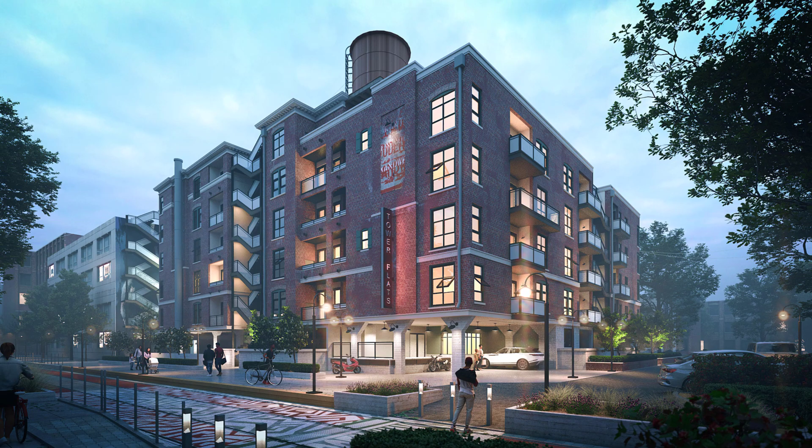I understand that many of you might have different workflows or different Archviz needs, and you might prefer programs that aren't the same ones I prefer, maybe because of price, speed, or overall power and capabilities. Remember I also have courses in other software like Twinmotion, SketchUp plus Lumion, and Unreal Engine. These are all great software that are very good at what they do. I also understand my needs, workflow, and goals in Archviz might be different than someone else's, and there are various different levels of visualization that may be needed.

But for highly realistic, professional architectural illustrations, visualizations, and animations, I still choose 3ds Max as my core Archviz software. I'm going to make my case in this video for why I think 3ds Max is still the best way to go. If you think my points suck, come at me in the comments, I'd love to hear your side of the discussion. And if you want to know the ultimate reason why I think Max is the best, or want to get a screaming deal on learning 3ds Max for yourself, stay tuned to the end of the video.

Okay, let's get into it with point number 1.

So the first thing is pricing options. This may seem like a strange one because to me 3ds Max has seemed way overpriced for a really long time. However, with the introduction of the Indie license, it actually became a really good deal. Mind you, this price does not apply to everyone, so if you're a big company, you can ignore this one, but for indie users, 3ds Max is an amazing value. Let's compare: 3ds Max Indie for 1 year costs $305. The full price is $1,875 if you don't qualify for the Indie license.

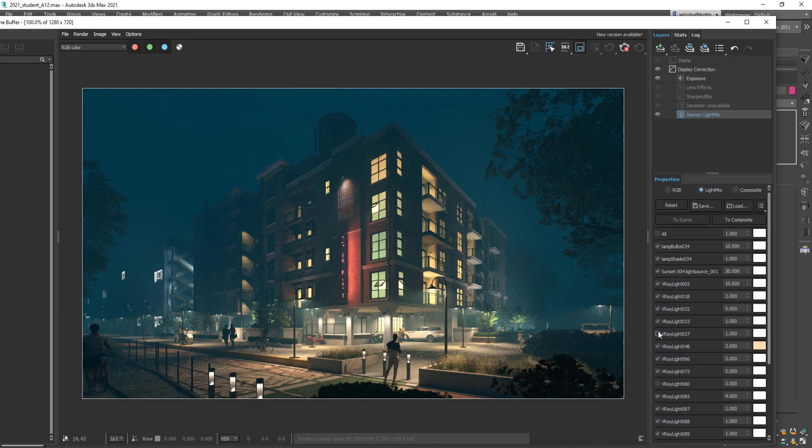Of course, 3ds Max includes full rendering capabilities built in with the high-end render engine Arnold, and that is certainly worth something as well. For example, VRay costs $466 a year for the most basic license. Real-time Archviz software can also be super expensive, and it doesn't even include the modeling capabilities. Lumion all by itself is $749 a year for the standard license and $1499 for the Pro license. Point is, considering all the things 3ds Max can do, the price is comparatively pretty good.

And if you qualify for the Indie license, it is very good. On this point though, it will never beat Blender, which is free, so we'll have to look at some other advantages that it has.

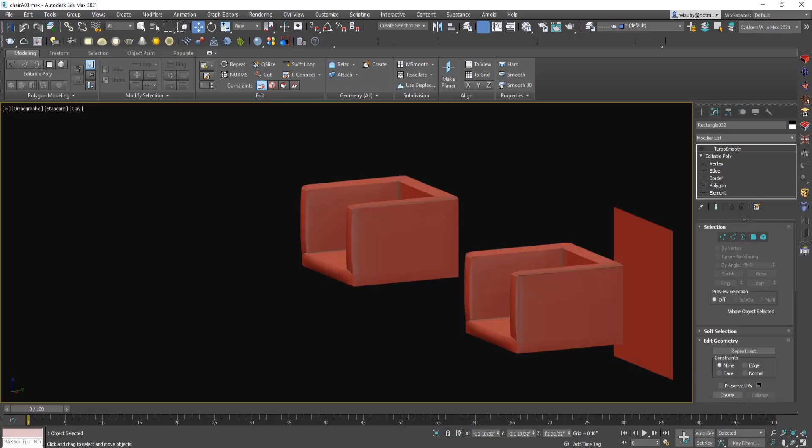So poly modeling and spline modeling - basically, modeling in general in 3ds Max is a huge advantage that it has. Personally, I love the modeling capabilities of 3ds Max, specifically because of how versatile it is and how much power it has. I often tell people the only limit to what you can create or model in 3ds Max is your own imagination, and that even goes for animation too. This is not true of some simpler, easier to use modeling software.

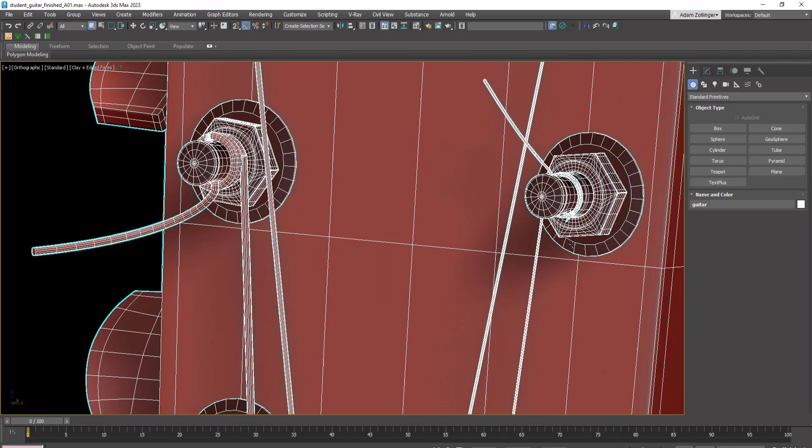A robust set of poly modeling tools is essential for me when I need to make hyper-realistic custom furniture, decor, architectural details, etc., and I make a lot of custom models. Other software can be very limited in this realm, so artists become reliant on purchasing pre-bought models and importing them into their software. This is a great resource, obviously, but it doesn't work for custom designs, which is what I'm doing a lot of the time.

Another element of 3ds Max modeling that I love is what I call spline modeling. I don't know what it's actually called, but there is a whole set of tools based around drawing lines, adjusting them with Bezier curves, and then extruding them.

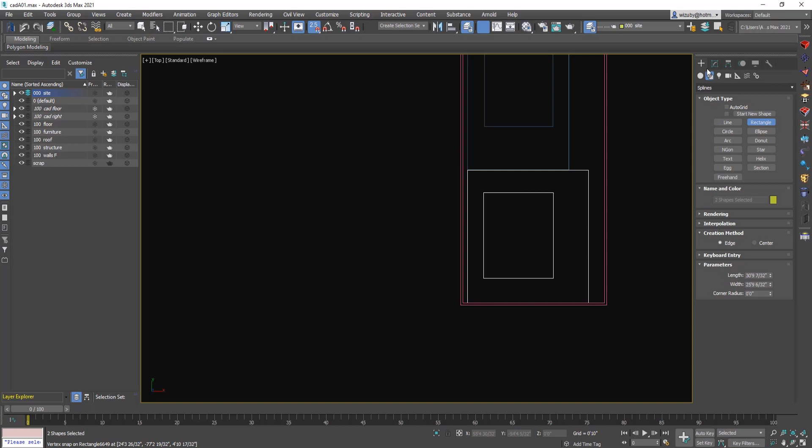This way of doing things is highly modifiable after the fact, so it's always easy to go back and change things later. This method and these tools are particularly useful for architecture, where many of the shapes are flat.

Like walls, floors, etc. For buildings and sites, I can usually build all of it just using spline modeling. When I have to get into fine details with more organic shapes, I rely on polymodeling.

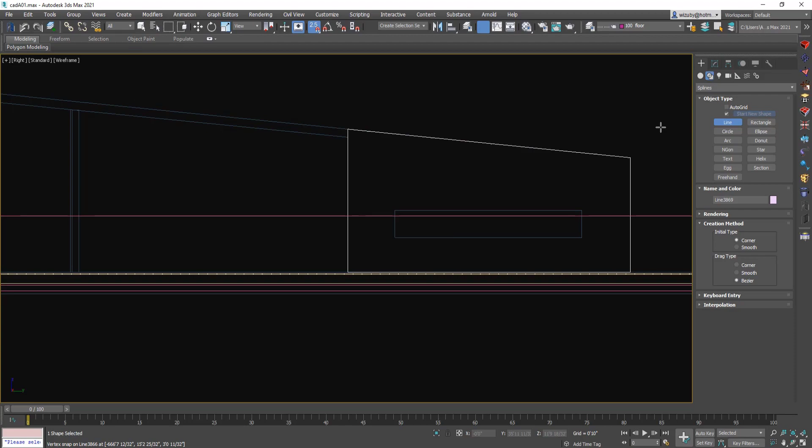To me, it's very important to have both of these capabilities built in, because that is the most efficient workflow for me.

Spline modeling leads me to another point, and that is modifiers. Of course, 3ds Max is kind of known for its modifier stack, which is extremely useful for Archviz. This is because so much of what Archviz artists do involves iterating.

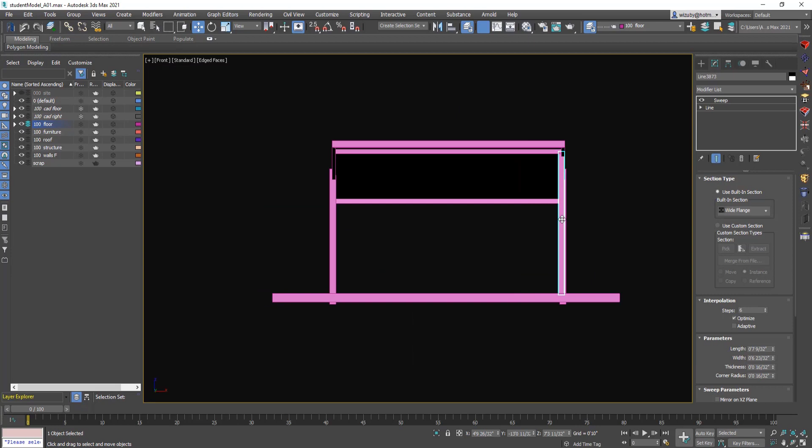Changes to your model are just a fact of life in Archviz. The fact that 3ds Max allows you to keep a history of your work via the modifier stack, and you can go back and adjust any of your previous steps at any time, that is huge.

Not to mention the fact that the enormous amount of modifiers adds huge amounts of capabilities to any spline, standard primitive, polygon model, or anything else in your scene. The process of starting with simple shapes and modifying them to become extremely complex organic objects becomes very evident in 3ds Max with its modifiers.

Just as an example, the UVW Map and Unwrap UVW modifiers offer all the control you need over the mapping of any object down to the minute details.

This is an extremely useful and necessary capability that is highly lacking in some other software packages. This is just one of many examples of very powerful modifiers, but also just being able to lay these out in a modifier stack is extremely helpful in my opinion.

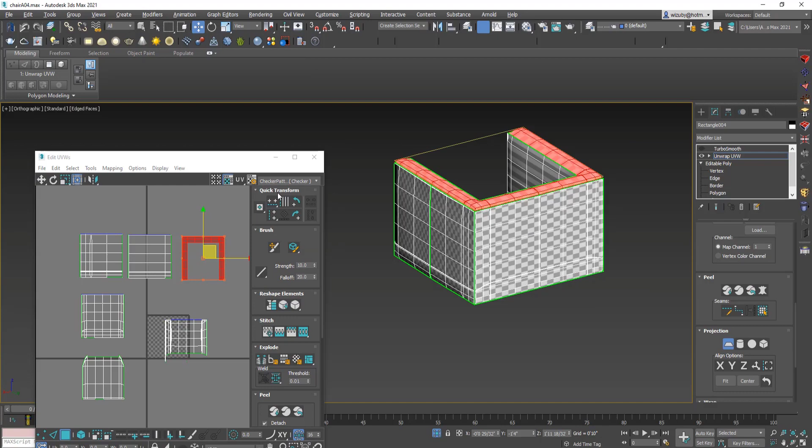It's a huge advantage for 3ds Max, specifically when it comes to Archviz.

Industry standard software. Okay, this might seem like a lame reason to like a software. Maybe it just started sooner or has better marketing. But in my opinion, being an industry standard actually has some really important benefits.

The first thing is that as an Archviz artist, on a daily basis I get asked, can you open this file? Or I just have to start every project by opening a model from somewhere else or from someone else. The fact that 3ds Max is powerful and an industry standard means it has a really good chance of being able to open files from elsewhere.

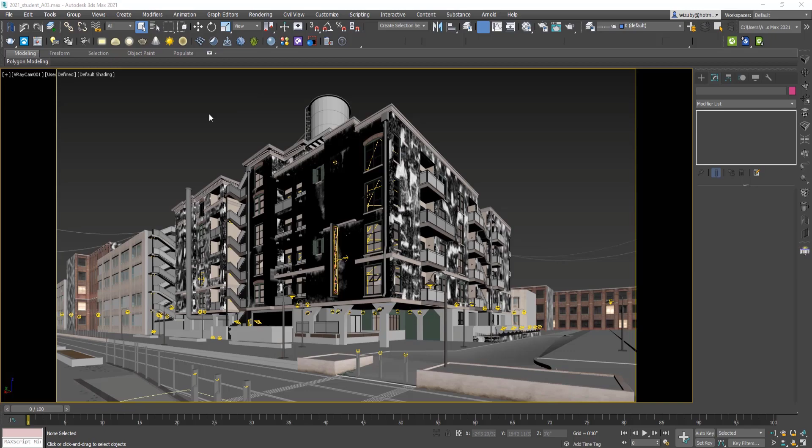If you're really lucky, whoever is sending you files may also be using 3ds Max. This brings up another point too. If you're buying models, there's a really good chance they are available in 3ds Max, especially high-end models.

Because Max is awesome at modeling stuff. There is absolutely no shortage of assets made specifically for 3ds Max, and a lot of this is because it is an industry standard and lots of people use it.

This is true for internet forums too, and this is another really important element. Software needs to be so widely used that a simple Google search will bring up forums where very specific, very niche questions are being asked and answered about your software.

Let's face it, this is how we all figure stuff out. Since 3ds Max has been around a really long time and has been widely used within Archviz, all the answers you seek are out there already on forums or YouTube tutorials.

Because 3ds Max is a popular software for Archviz, there are a lot of very high-end Archviz plugins developed specifically for it. The ultimate plugin for me, of course, is VRay.

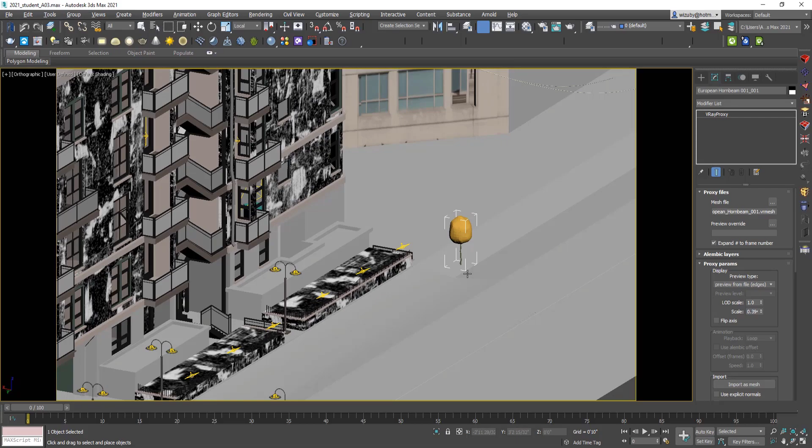I love the way it perfectly integrates with and extends the capabilities of 3ds Max. Now it can actually even act as my asset library with Cosmos, and even my scatter tool with VRay Scatter.

But beyond that, it already handles my lighting, materials, and rendering in a very streamlined and highly photorealistic way. It has additional tools like proxies, which save memory and streamline my workflow.

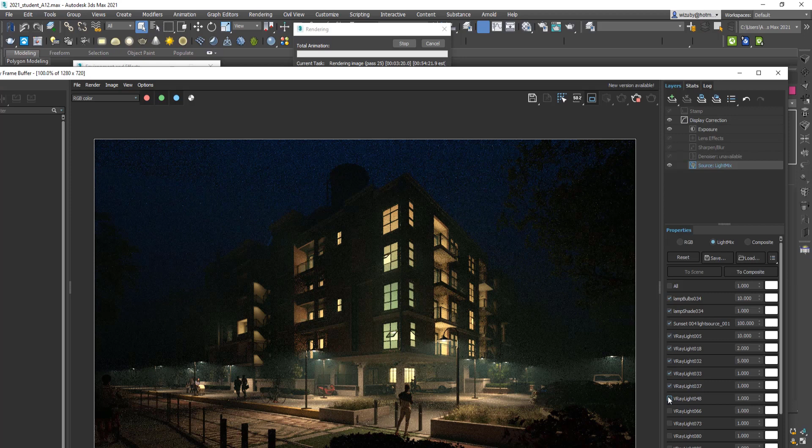Personally, I think 3ds Max and VRay, or similar, is still the killer combo when it comes to a full-blown professional modeling and animation tool, and professional rendering tool to go with it.

Most of the super high-end, highly photorealistic renderings I see online are still created with 3ds Max plus VRay, or maybe 3ds Max plus Corona, which is of course very similar in capability to VRay. Another plugin I use extensively is Forest Pack Pro, but really the possibilities with plugins are endless. There is no shortage of plugins that can increase the power of 3ds Max even further.

So to summarize, 3ds Max is the best Archviz software out there because it is pretty competitive in its pricing, and if you qualify for the Indie license, it's excellent in its pricing. Second, it can model absolutely anything, and it has specific modeling tools very much suited to Archviz tasks. It has the Modifier Stack, which is Archviz friendly because Archviz projects often change and adjust as they go. It's an industry standard software, so there are tons of resources available in the form of plugins, models you can buy, and answers to your software questions. And lastly, there are tons of plugins available, many designed to make it even more perfect for Archviz.